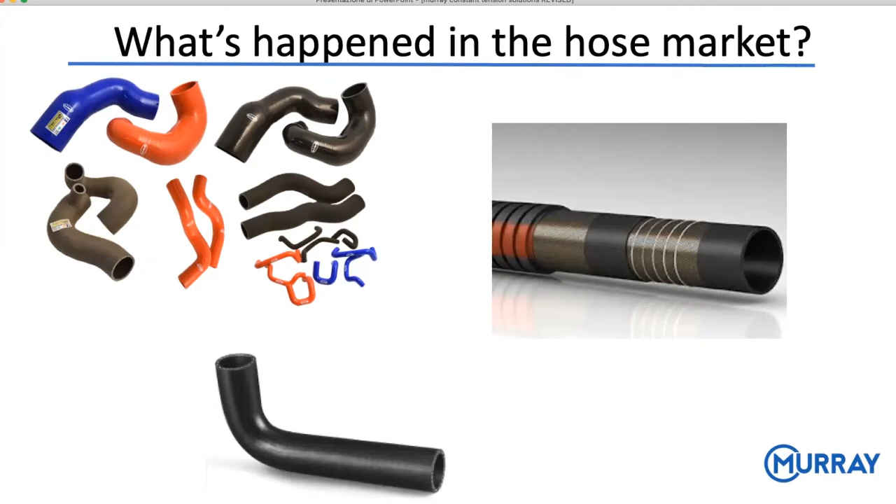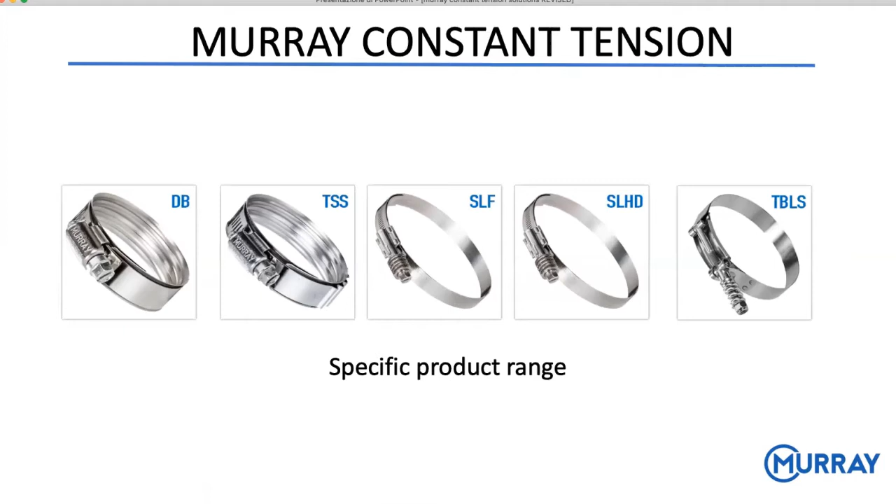This is our constant tension full range. We have a full and complete range of products developed for these kinds of issues. We will go deeper into all these products to explain to you the benefits and to better explain to you how they work.

What are the application fields for the constant tension clamps? The fields are automotive engine turbo intake or exhaust, air intake, intercooler, power generators, marine engines, and earth moving equipment. So everywhere that you can experience temperature changes, extreme conditions of applications, or vibrations.

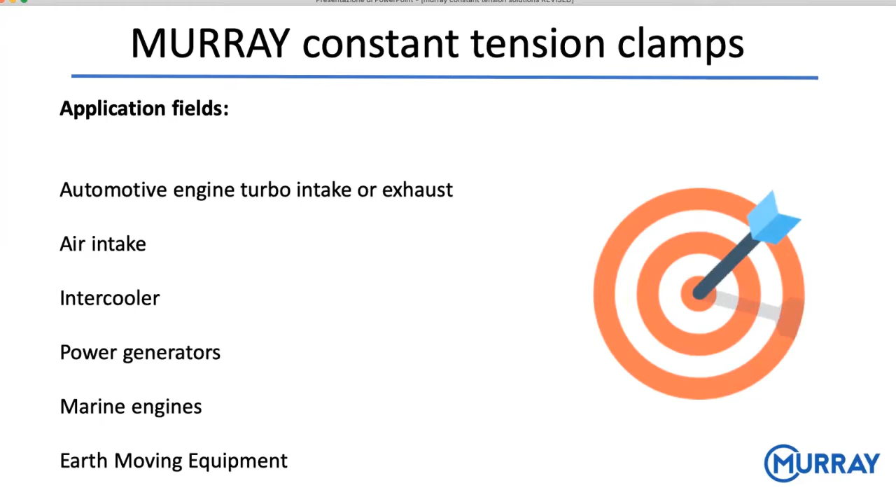Now we want to show you a short video that will explain how some of our constant tension clamps work. Particularly, we will see our Dual Bead and Turbo Seal. So let's take a look at the video.

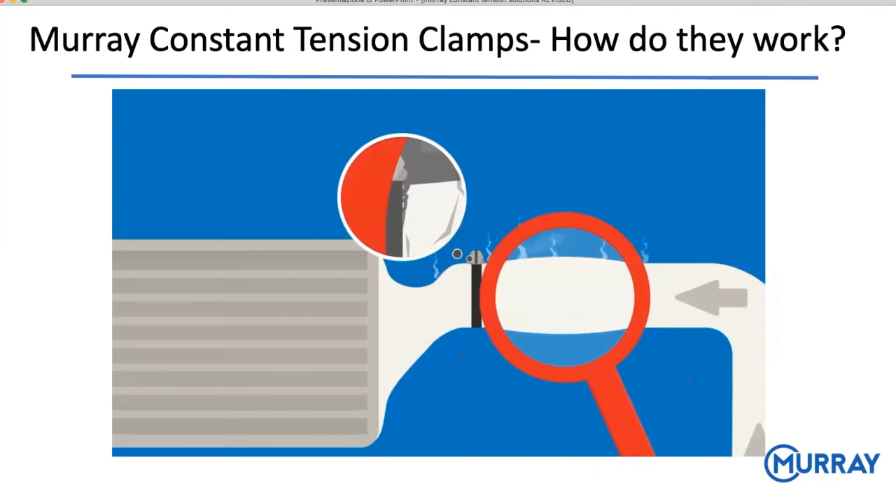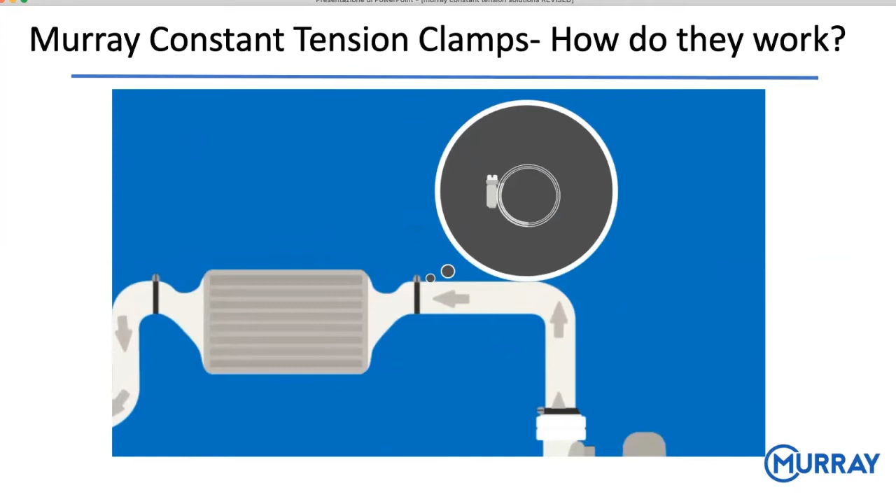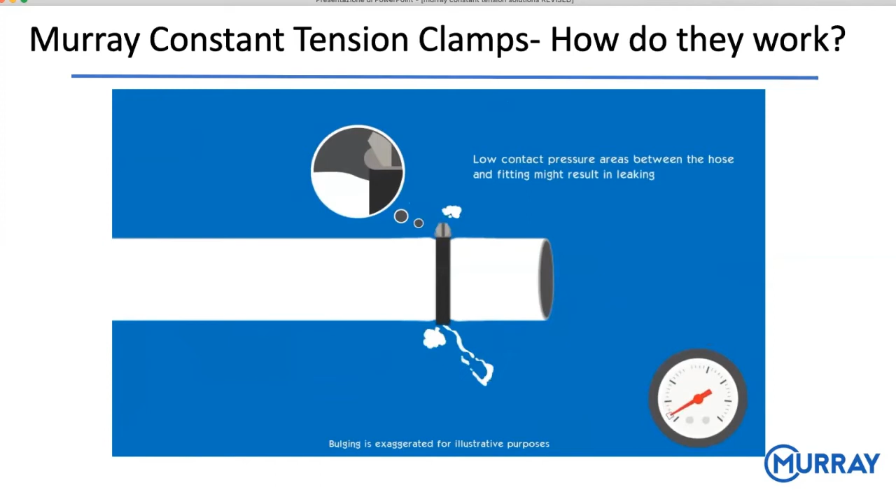Today's higher boosting turbocharged engines face several performance challenges: hose blow off or creep, or conditions that lead to leaks, damage of costly silicone and other soft hoses, cold flow which leads to leaks and poor performance, and the need for frequent retightening of hose clamps. Murray Corporation makes two clamps that solve these problems for the high demands of the motorsports world, where conditions are significantly more severe than the typical conditions most turbocharger applications will face. The single spring action dual bead clamp has a Murray worm gear clamp with a dual bead shield positioned within the band. When the hose is compressed, if the clamp is not adjusting and springing inward to maintain constant tension on the hose, there will be gaps between the hose and clamp, which will likely lead to leaks and lost boost, affecting performance. When using the Murray dual bead clamp, the inner shield creates a single spring action.

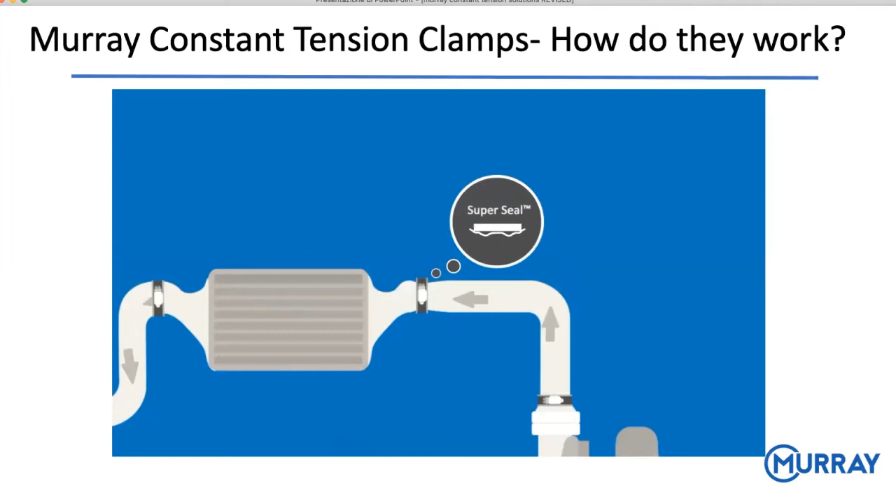As the clamp is tightening, the inner shield will spring to absorb some of the tightening load. Therefore, when the hose relaxes as a result of cold flow, the inner shield will spring inward and continue to apply constant tension on the hose.

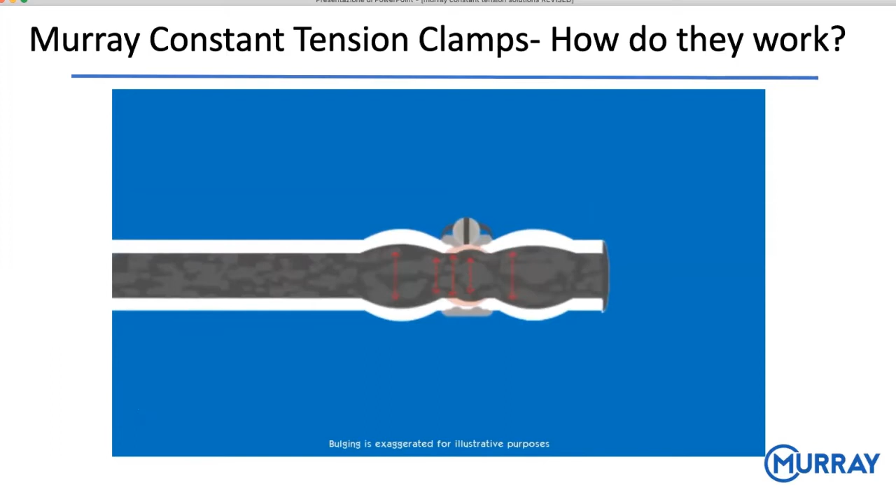In addition, the dual beads will bite down into the hose, creating a super seal and an O-ring effect. These features help the dual bead eliminate hose creep, blow off, and loss of boost. The beveled edges protect soft hoses.

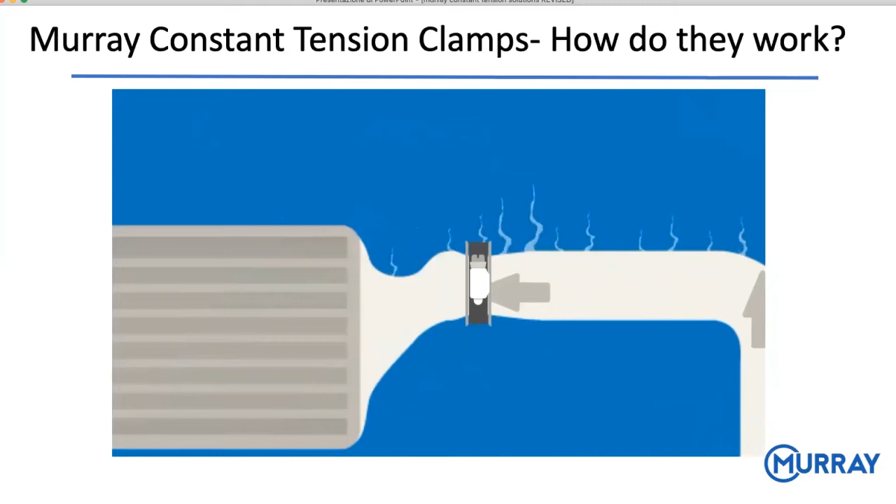The dual action turbo seal clamp has a convoluted, heat-treated, and electro-polished band, which allows for expansion and contraction. During thermal cycling, the hose experiences cold flow and creates the possibility of loose clamps where blow-off and leaks occur.

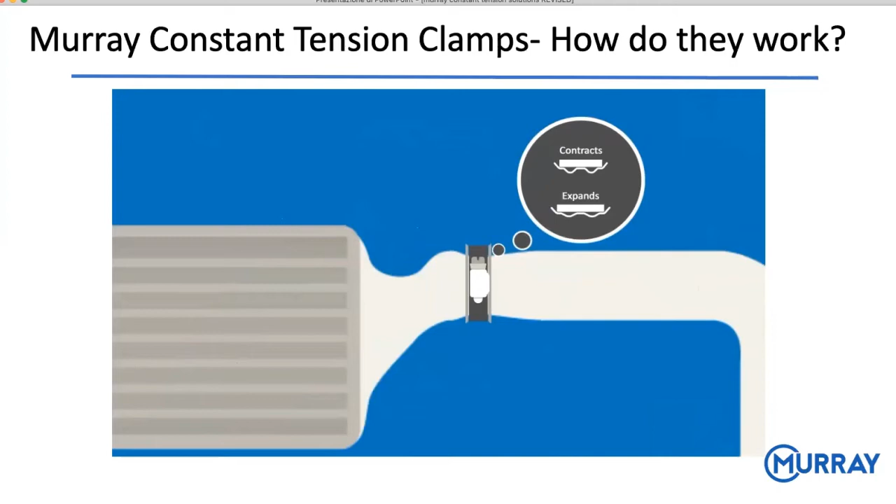The inner shield and the convoluted band combine to provide added spring in the clamp, so that as the hose becomes further compressed, the clamp springs inward to provide added clamp load to better prevent hose creep, blow-off, and loss of boost. The electro-polished band improves corrosion resistance and reduces material fatigue, improving the life and performance of your clamps.

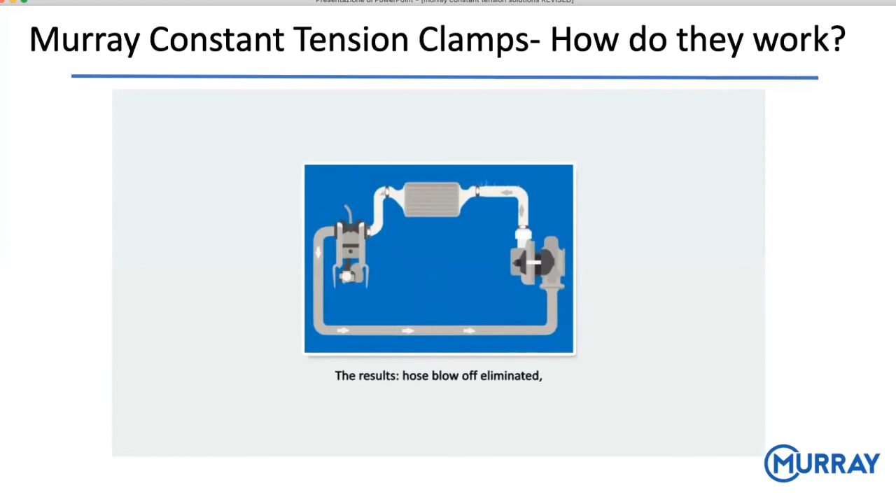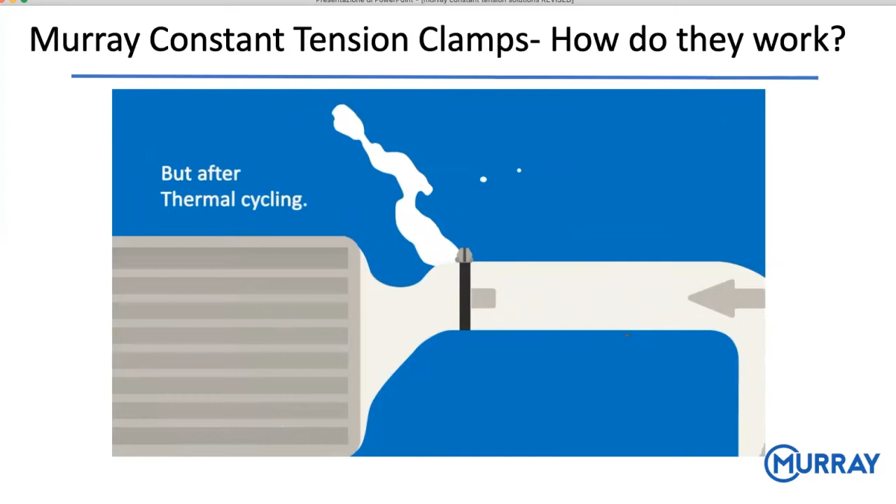The results? Hose blow-off eliminated, and damage to engines and turbochargers is prevented. The older type of clamp relies on over-tightening to create a tight seal, but can damage your expensive hose. The Murray Turbo Seal and dual bead clamps don't require excessive tightening to create a tight, secure seal because of

their smart design. Some types of clamps can take up valuable engine space under your hood and become a hazard during maintenance. The Turbo Seal and dual bead clamps are low profile and take up less space under your hood, improving serviceability. The motorsports world agrees.

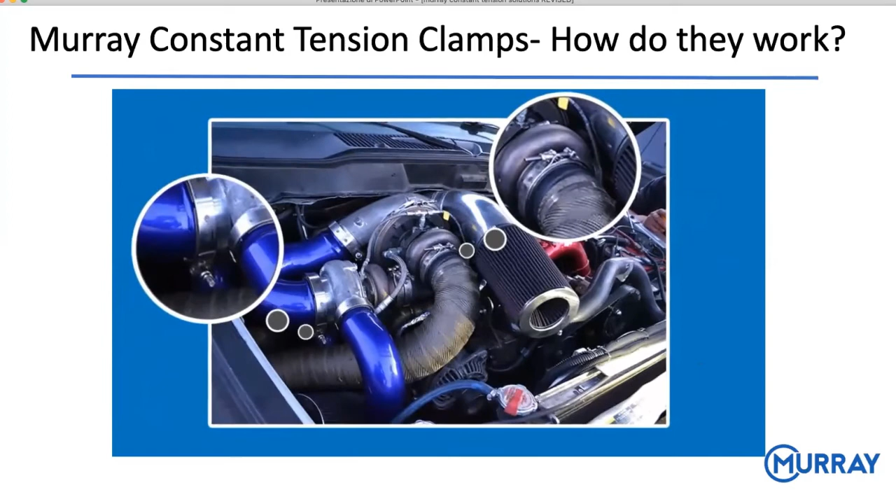Here is what they have to say. The world record-setting Mark Higgins race team and turbo specialist Owen Developments have said, when properly sized and installed, there is no more economical way to ensure a secure connection on your turbo and eliminate hose blow-off. The connection will remain intact even during the most challenging and rigorous racing conditions.

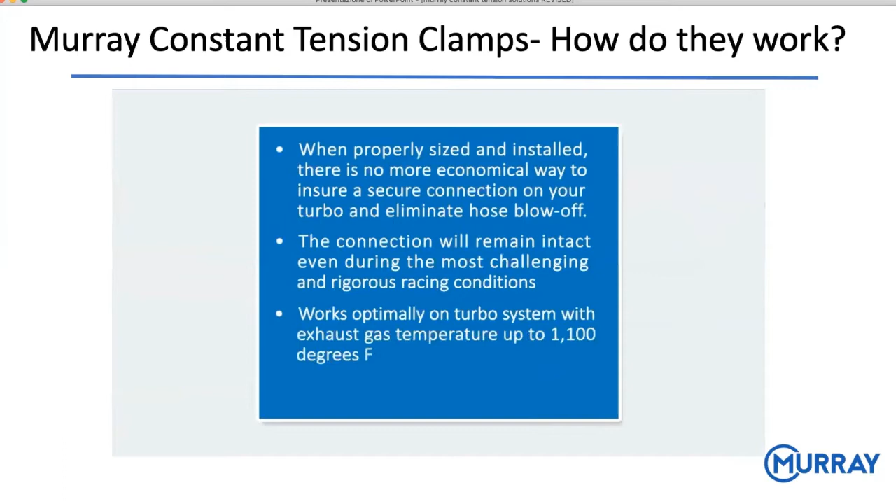So you saw in this video how our TSS turbo seal and dual bead clamps work. Now we start to go deeper on each kind of constant tension clamp that we have in our product range. And we start with our dual bead.

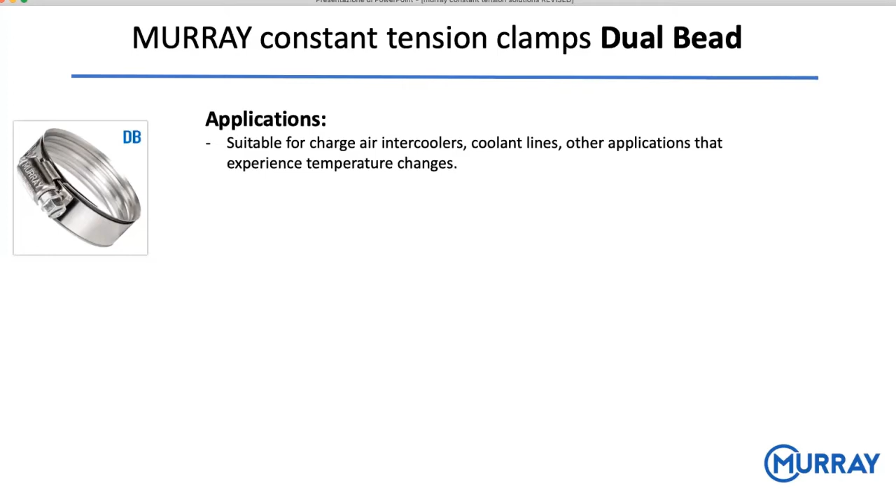The applications for this kind of clamp are charge air intercoolers, coolant lines, or other applications in which you experience temperature changes. They are ideal for use with soft hoses like silicone or rubber hoses without reinforcement.

The benefits of this kind of product are that this clamp is able to eliminate leaks resulting from cold flow of hose. The rolled edge of the dual bead band liner protects your hose from cuts. The low profile allows for use in applications with limited space.

And talking about this clamp, we have one customer that is a German industrial engines manufacturer that decided to put this kind of clamp on a rubber hose, which is not a soft rubber hose, on which this product is not so necessary. But they have an assembling process that stresses the clamp so much that they really appreciated the dual bead liner that is able to protect the hose from the over tightening that they were forced to do.

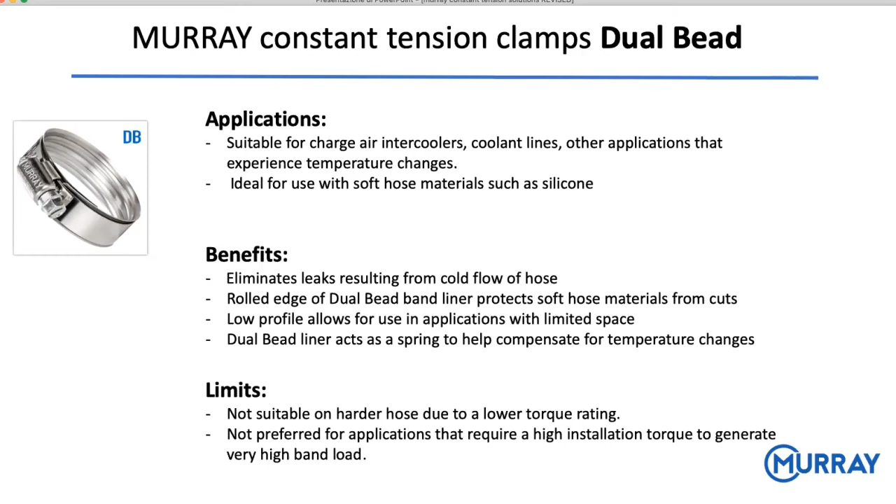and is not preferred for applications that require a high installation torque to generate very high band load. And now let's talk about our turbo seal, the most appreciated in the motorsport market, and that starts also to be very popular in the industrial market for heavy duty needs like buses, earth moving machines, etc.

So the applications are on charge air intercoolers, on coolant lines, everywhere you can experience significant temperature changes. And obviously it's ideal for use on soft hoses like silicone or rubber hoses without reinforcement.

This kind of clamp can grant a unique high performance dual spring action that can compensate extreme temperature changes. The constant tension design eliminates the need to retighten the clamp after thermal cycling.

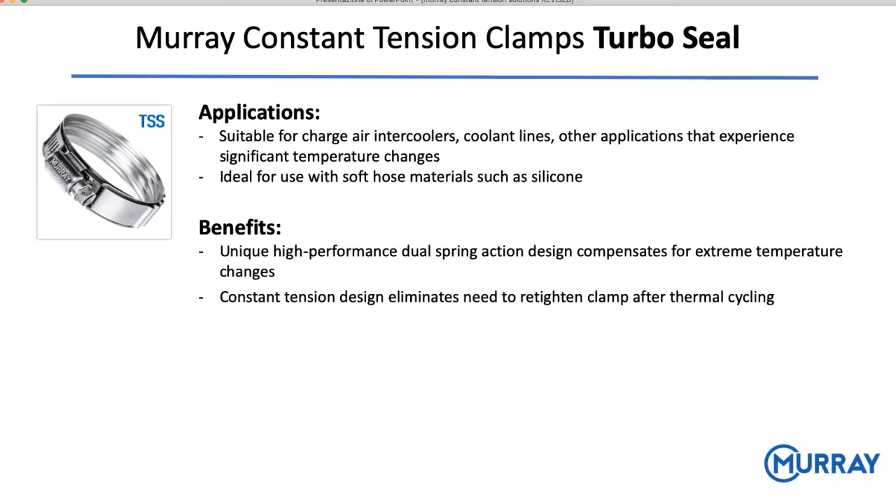On this point, we experienced, thanks to General Motors, that decided to put these clamps in their climate testing rooms. So in these rooms, they tested engines with temperatures that move from many Celsius degrees below zero till very high temperature. Thanks to our turbo seal, they told us that they don't need to retighten the clamp during the tests, and this is very important for them.

The rolled edge of the dual bead liner protects your soft hose from cuts. And the low profile is ideal for use in applications with limited space. You have to consider that with this shape, we can reach a maximum diameter of more than 200 millimeters.

The limits of this kind of clamp are that it's not suitable on harder hoses due to a lower torque rating, and is not preferred when a high installation torque is required to generate very high band load.

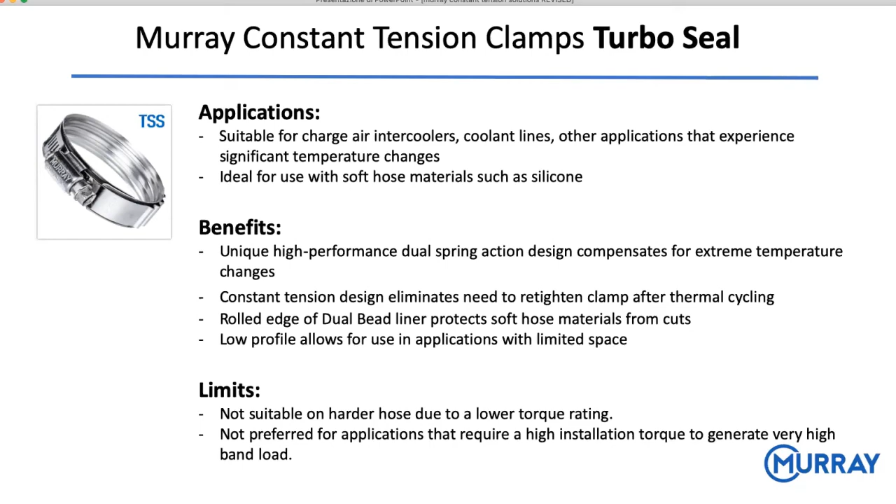We want to show with you also some test reports that we made in third-party laboratories. So we asked to test our Turbo Seal against other competitors' constant tension clamps.

The test was made putting the clamps on a silicone hose with air, put it into water. As you can see on the left side, we increased the pressure of the air till it reached a leakage.

You can see we have 3 bands per each color, so we have the high, the low, and the average. But every time the performance, so the level of pressure that you need to have a leakage with our Murray Turbo Seal, is higher than our competitors.

You can see also the installation torque. So we made the test increasing the installation torque. At the end, we put the residual torque that you can see, to come back to the initial installation torque situation.

With the Murray TSS, you need less torque to come back to the initial situation. That means you lose less torque, which means you reduce the risk of leakage. We made this comparison with 2 different constant tension products, 2 of the most popular in the market, and the results are what we are showing to you.

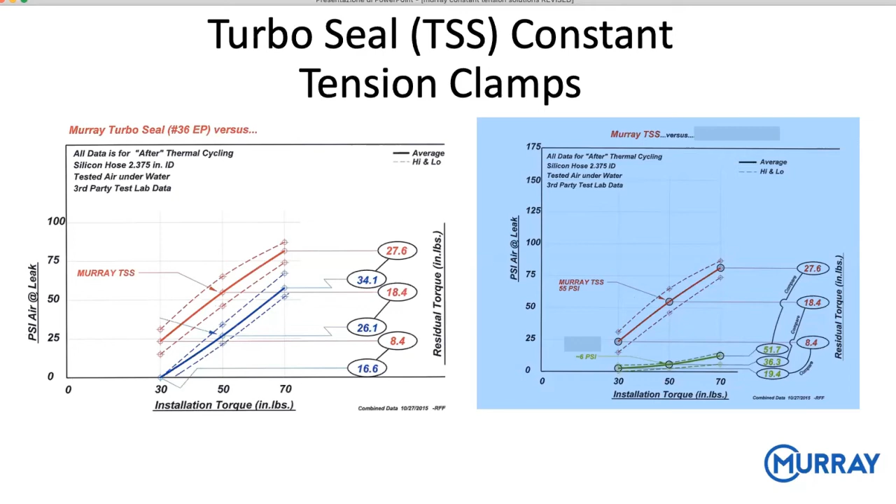Now let's talk about our stack drive constant tension clamps. These clamps are suggested for charge air intercoolers, coolant lines, hydraulic hoses, and applications that experience temperature changes. Thanks to the Belleville washer stack, you have a spring action that helps eliminate cold flow leaks. You can put this clamp also on harder hose, and this kind of clamp is able to generate good resistance to hose fitting separation.

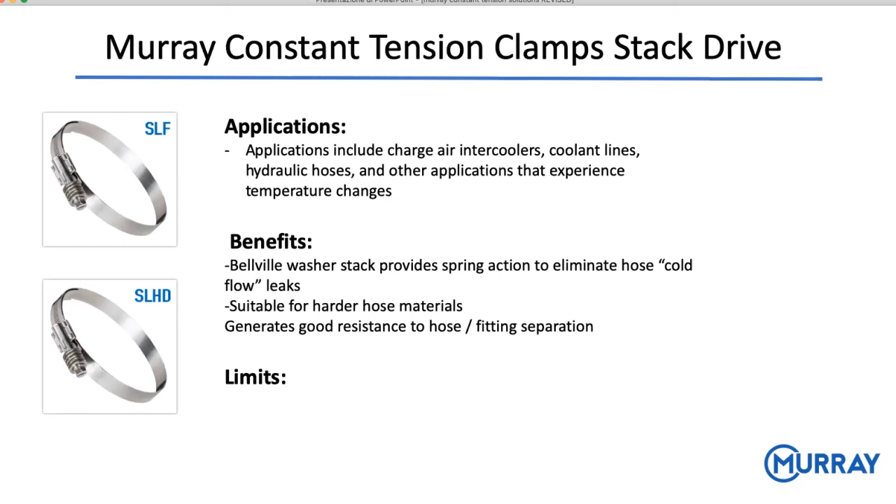The limits of this clamp are that the smooth flat inside of the band can lead to the hose creeping under pressure and vibration if not properly installed. Something very typical with this kind of product if you don't pay attention to how you install the clamp. And obviously it's not preferred for use in applications with limited space.

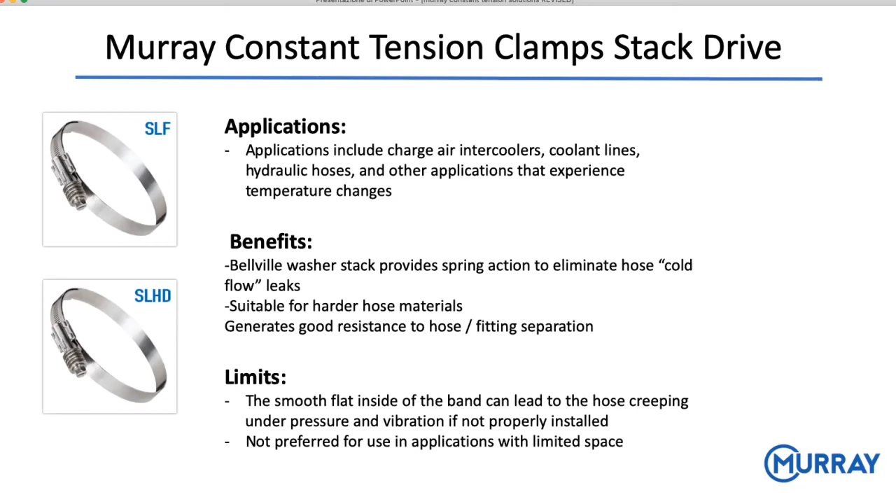Now let's talk about our spring-loaded T-bolt. This product is suggested for charge air intercoolers, coolant lines, industrial hose connections, or whenever you experience temperature changes. The benefits are that thanks to the spring design, this clamp is able to provide automatic temperature compensation to eliminate cold flow leaks. This kind of product is popular in very big industrial engines, power generators, or irrigation markets or similar.

This clamp is suitable for use with harder hose material, also having thick walls, and is recommended for use where high clamp force and resistance to hose pull-off are required. The limits of these kinds of clamps are that they're not preferred for use in applications with limited space, and the smooth flat band inside can lead to the hose creeping under pressure and vibration if not properly installed.

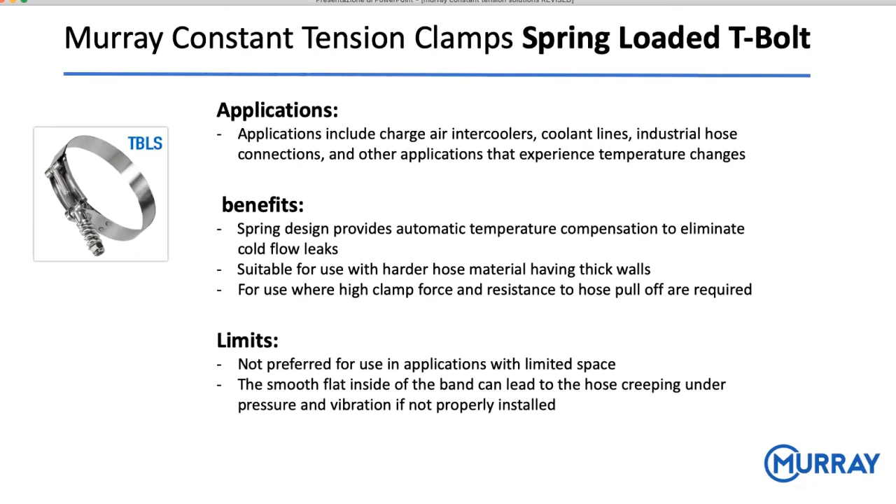So this was our portfolio of constant tension clamps. Some of them are probably already well known in the market, some of them are something you saw, but we want to convey that constant tension clamps need to be put in the right way on the right application, and we are here to help you with it.

Now we want to talk with you for a few minutes about e-mobility, because these kinds of clamps are very popular on thermal engines, but we know that e-mobility is growing daily. So they need clamps too.

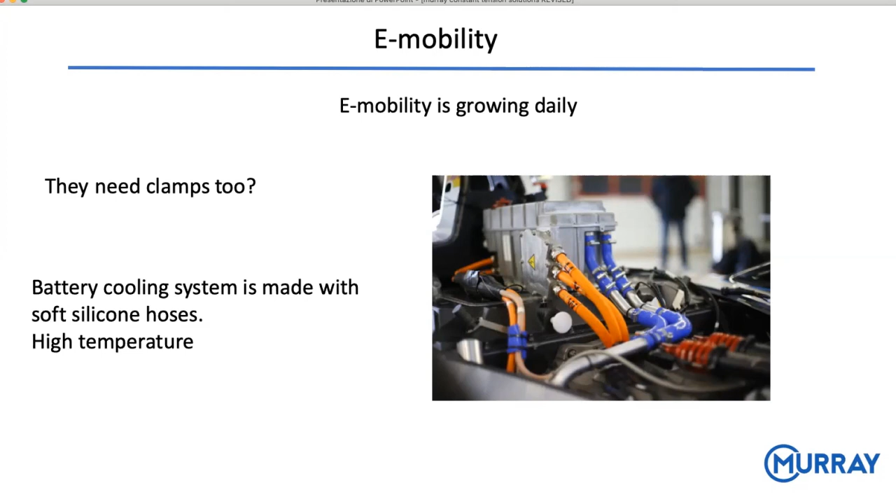Yes, for sure, because as you can see in this picture, that is a battery pack from Williams, in the E-Formula race teams, you have a lot of silicone hoses on the cooling system for the battery pack. All these hoses experience temperature changes, lots of vibrations, so it's the application field in which you need a constant tension clamp. We are ready, and we've already supplied some companies involved in e-mobility with our constant tension clamps. We are ready to support you in your project also for this kind of market.

So today we talked about why a clamp can make the difference, and why a constant tension clamp can make the difference. We talked a little bit about the evolution in fluid lines, something that forced a lot of industry companies to modify their projects to solve leakage problems.

We showed you how a constant tension clamp works. We talked about strengths and weaknesses of constant tension clamps. And we spoke a little bit about e-mobility.